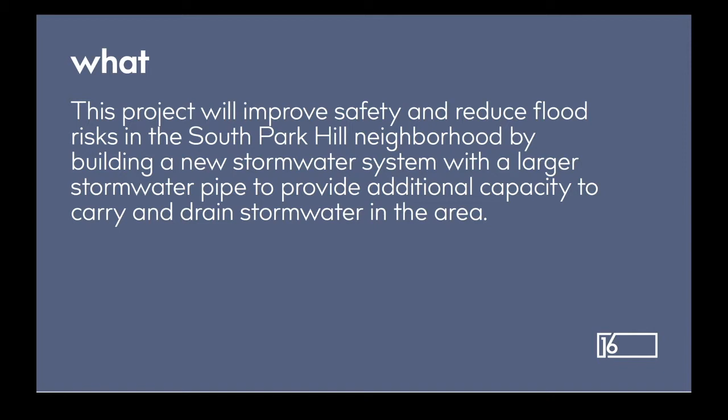So first we'll get into the what of this project. What are we doing? Overarchingly, this project is to install a new storm sewer system and upgrade the existing storm sewer system that's in place, which services the South Park Hill neighborhood. This is the first phase of this project. Eventually, over the next handful of years, this project continues down through the South Park Hill neighborhood and addresses further flooding issues that are in the basin. But the intent of this project is to increase the capacity of the existing storm sewer system in the area.

In addition to the storm pipe we'll be installing with that new infrastructure, we will also be reconfiguring some roadways, specifically how eastbound 17th Avenue Parkway is accessed. Currently there's a little traffic island there. That eventually, as part of this project, will go away. It'll be a smoother transition, especially for people heading northbound on Colorado Boulevard that are trying to go eastbound on 17th Avenue Parkway. The way you access that will eventually change.

Also with this project, we will be upgrading the existing traffic light that's on Colorado Boulevard there, and also adding a section of bike lane into westbound 17th Avenue Parkway, along with a signalized bike traffic crossing at that location.

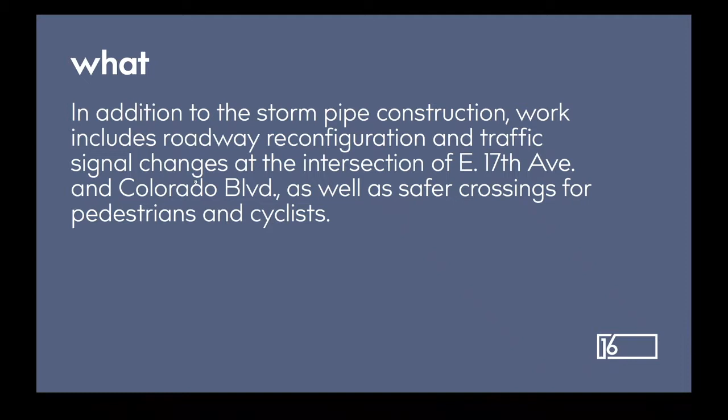The where of this project.

This project begins at Jackson Street and 17th Avenue. We will be tying into an existing storm sewer system. If you're familiar with the neighborhood, approximately 15 or so years ago, a new increased storm system went into Jackson Street heading into City Park. This project will tie into that system and then head east down 17th Avenue towards Colorado Boulevard.

We'll actually be tunneling underneath Colorado Boulevard with the infrastructure to reduce impacts to Colorado Boulevard traffic as much as possible, and then continue the alignment of the new storm sewer infrastructure down 17th Avenue Parkway to Albion Street. At that point, we go 100 feet or so down Albion Street to the south, and that's where this first phase of the project ends.

Eventually, future phases of this project will send new infrastructure east down Batavia Place down to Dahlia, and then at Dahlia it will jog to the south and then continue east along 16th Avenue. So don't be confused—even though the project is called 16th Avenue and you might be scratching your heads looking at this saying, well, they're only on 17th Avenue. That's because it's just the first phase of an overarching project that is intended to handle existing stormwater concerns and drainage concerns in the 16th Avenue corridor.

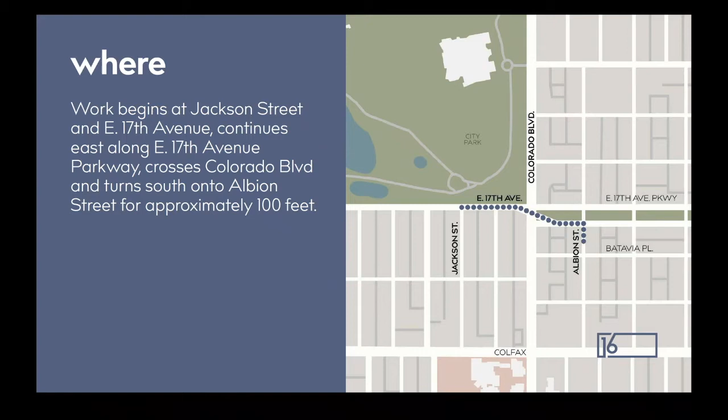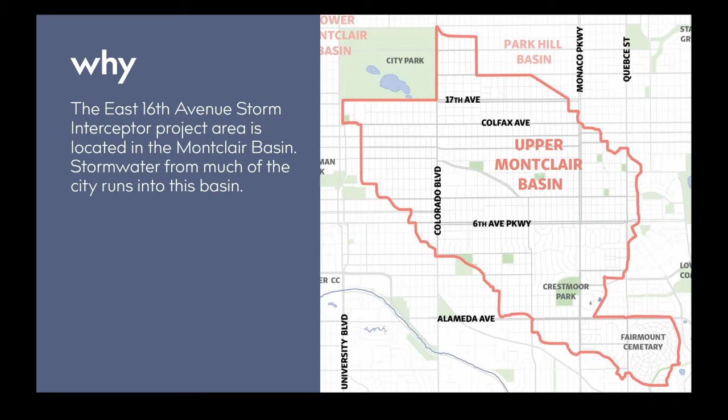Why are we doing this project and why will it impact the community? The why is because, as you can see here, the entire upper Montclair Basin is a very large area of the city, and eventually a lot of storm water enters into this basin and causes problems all over the basin. This project is just one of the attempts to help address that stormwater in the Montclair Basin.

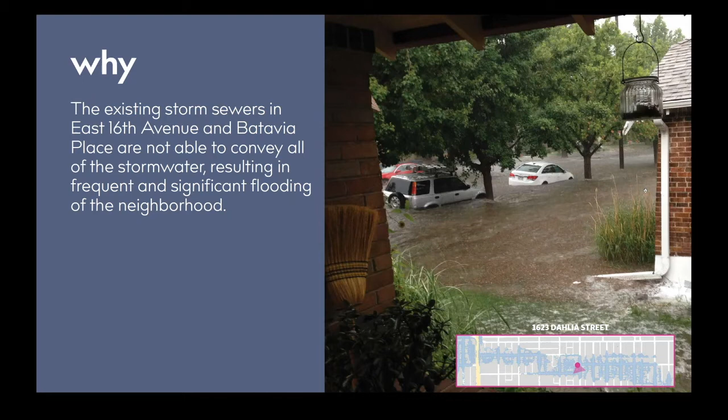There are already storm sewer systems in place. A lot of these storm sewer systems were built in the early part of the 20th century. Specifically, running down 17th Avenue, there's an old 42-inch brick main. 100 years ago, that pipe was good enough to handle the flows. Currently, with the development that's happened in and around the whole city of Denver, the more impervious surfaces we place, the less rainwater has the ability to soak into the ground as it's naturally intended. With that increase of impervious surfaces comes more street runoff flowing into the storm sewer system, building up and pushing this existing infrastructure to its maximum capacity.

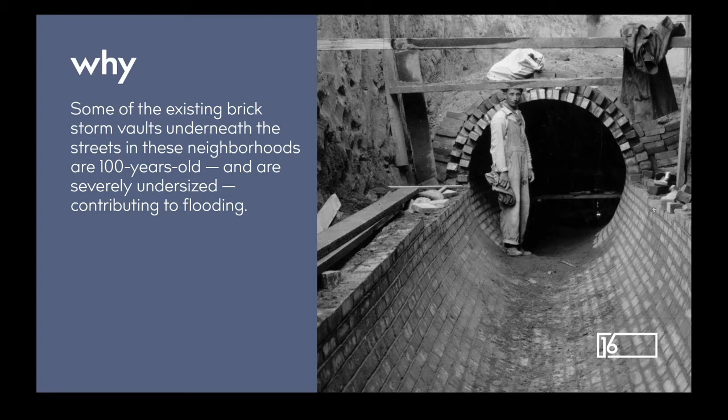A little bit of a visualization here. A lot of the existing infrastructure, as I mentioned, is 42-inch diameter brick pipe, and a big portion of what we're doing, especially on 17th Avenue west of Colorado Boulevard, will be placing a 9-foot by 9-foot box culvert. Obviously, that increases the capacity of the existing infrastructure significantly. To go along with this 9-by-9 box culvert, where we tunnel underneath Colorado Boulevard we'll be placing a 120-inch diameter, 10-foot diameter pipe. That larger capacity pipe carries down 17th Avenue Parkway to Albion, and eventually this larger infrastructure will go all the way into the neighborhood.

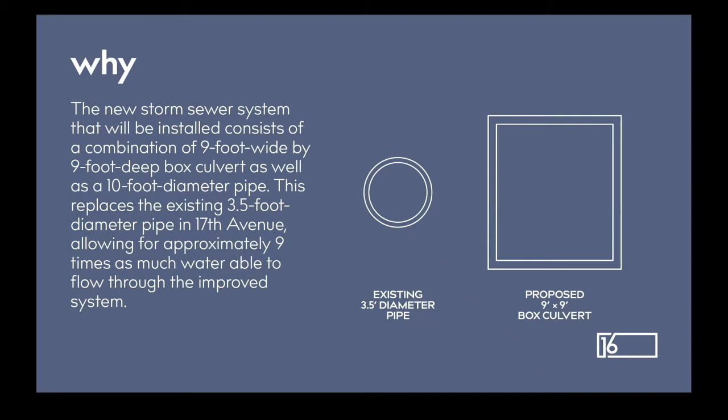When is the project going to happen? We are in the process of issuing the notice to proceed to BT Construction. Their contract officially begins on Monday, April 12th. It is a 365-day period of performance for their contract, so we anticipate being completed with this work in the spring of 2022.

How is the project going to, what's the construction methodology that's going to be utilized? It's kind of twofold. The majority of the contract and infrastructure work we will be placing by digging open trenches. And then again, the section underneath Colorado Boulevard will be utilizing a tunneling effort.

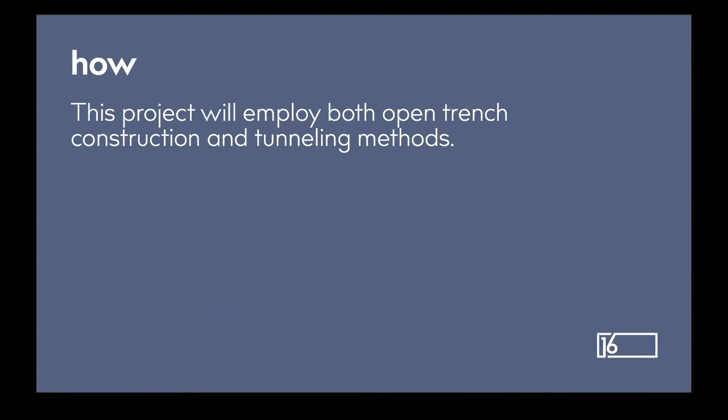That's known and referred to as a slide rail system. It consists of large posts that are driven into the ground, and then panels in between the posts. As the contractor digs the soil out of the excavation area, the panels slide into place and slide down to protect the workers and keep the trench from collapsing on itself.

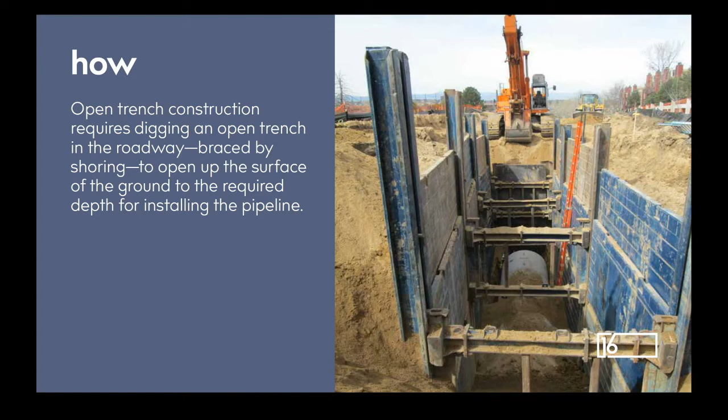The other methodology, tunneling underneath Colorado Boulevard, basically consists of digging a large excavation, a large pit on either side of Colorado Boulevard, and then installing a jacking or a ram assembly where you basically drop the pipe sections down into the open pit.

Through various processes that they will utilize, they'll either go in and actually hand tunnel, sending workers in to hand tunnel underneath the roadway and progress that pipe with the ram, or utilize a different methodology with an auger or a boring machine that bores out the soil and installs the new pipeline behind it.

We're utilizing that technique at Colorado Boulevard as a way to reduce the amount of impact rather than having a large excavation running all the way across Colorado Boulevard and shutting traffic down for multiple months. This methodology of tunneling reduces that impact.

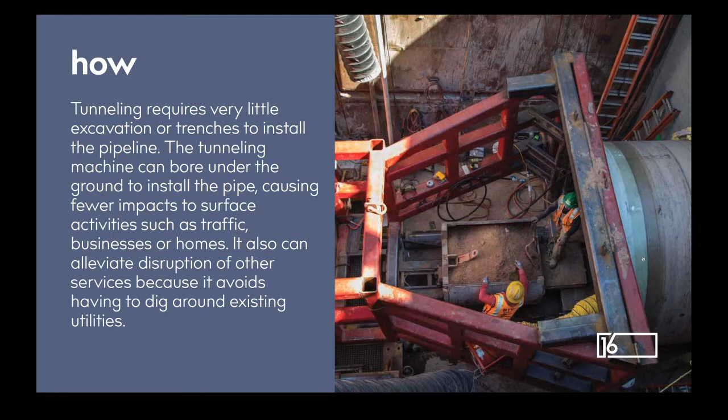Speaking of impacts, there will be obvious traffic impacts, just based off of the last couple slides and the pictures that are shown there. The magnitude of the infrastructure work that has to happen cannot be done without having to close down sections of roadway.

There will be street closures on 17th Avenue. There will be periods of time, and we'll get into it a little more in detail, where Colorado Boulevard has to be shut down, even though we are doing the tunneling effort. There are other activities that will shut Colorado Boulevard down. And then also on the east side of Colorado Boulevard, there will be periods of time where 17th Avenue Parkway is shut down as well.

Any of the residences that are immediately adjacent, facing 17th Avenue, facing Colorado Boulevard, facing Albion Street, when we get onto there, we will reach out to you directly, typically through knocks on the door or flyers placed on the door to let you know exactly what's going on.

A little more in detail on the specific traffic impacts. Approximately around the 1st of May, we will be looking to shut 17th Avenue west of Colorado Boulevard down in both directions, full closure starting at Jackson Street. So from Jackson to Colorado Boulevard, that section of roadway is going to be shut down.

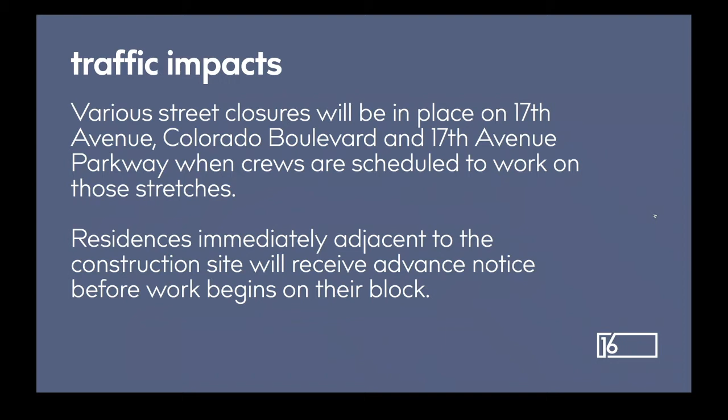During all of these closures, walk-up access to residents and businesses inside the project area will be open. There will never be a period of time where you will not be able to access your front door if you live on 17th Avenue or 17th Avenue Parkway or Colorado Boulevard.

Alley accesses will remain open. They'll just be closed where they intersect with the closed roads, so they'll basically become one-way dead-end alleys.

Detour signs and message boards will be up throughout the duration of the project in order to alert commuters about the work and provide the anticipated detours that will be put into place to handle these anticipated closures.

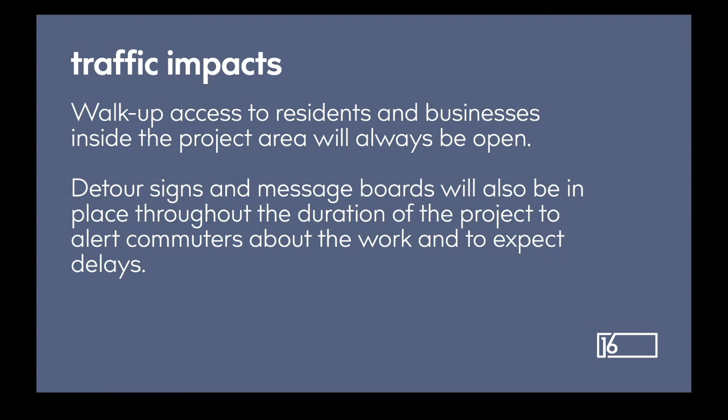Another common question when we're performing infrastructure projects of this size is vibration concerns. City of Denver recognizes those concerns and understands the impact to a property owner when we're performing construction adjacent to their property.

We have produced a pamphlet that contains information on common vibrations caused by construction. That pamphlet is available on our website, which you can see there: bit.ly/16Storm.

If your property is directly adjacent to any of the work that we're performing, if you have not already received it, you will be receiving this pamphlet along with a flyer from our contractor's vibration consultant, offering an assessment of your property prior to the construction work beginning.

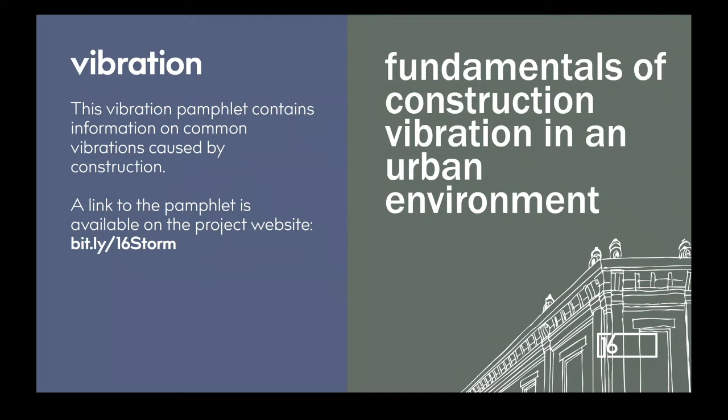Ways to stay informed about the project: we have set up an email address that's specific to the project. You can email us at info@16thAvStorm.com. Along with this, we strongly encourage you to sign up to receive weekly project updates.

Every week, our public information team will get with the project team and find out what the status is on schedule and any anticipated upcoming closures or changes in detours, and send that out to everybody that's signed up for the updates. To get on the list, simply send an email to the provided address and request to be included on the weekly project updates.

You can also email this address with any questions or concerns you might have.

We've also provided a project hotline. That project hotline phone number is 720-627-7441. The hotline will get updated weekly with updates, and you can leave a voicemail, or it provides you with the opportunity to text with any questions or concerns.